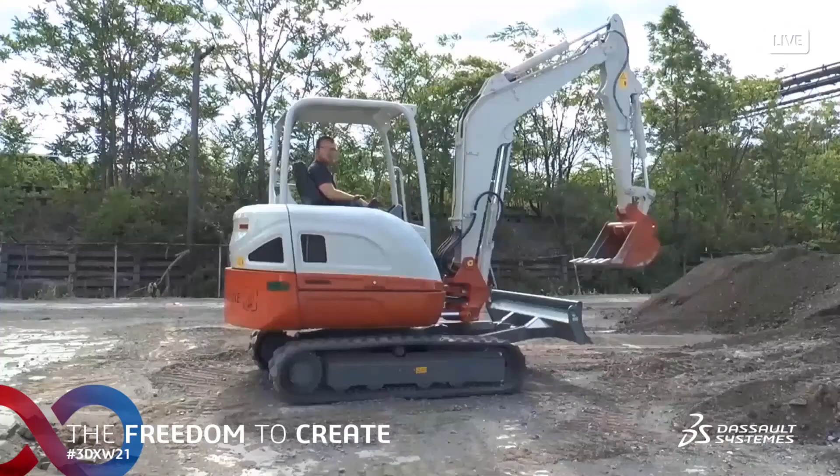So Green Machine, I love the company name, and you started to share a little bit about what it's all about there. But so is it a conversion process, or maybe you could dive into that just a little bit more? We sort of have three strands to the company. One of them is developing drive systems for OEM equipment, so actually taking diesel equipment and converting it to electric. The other is providing battery packs and drive systems to OEMs that want to develop their own electric line of equipment. And the third is actually a sort of sister company called Volta Energy Products, and they use some of our core battery technology in stationary storage. So this would be for grid storage, demand response, things like that.

Well, that's all very interesting, Noah. So thank you for sharing that, a little bit about Green Machine and also about yourself. So let's now just talk about Solidworks and how Solidworks earned its way inside of Green Machine.

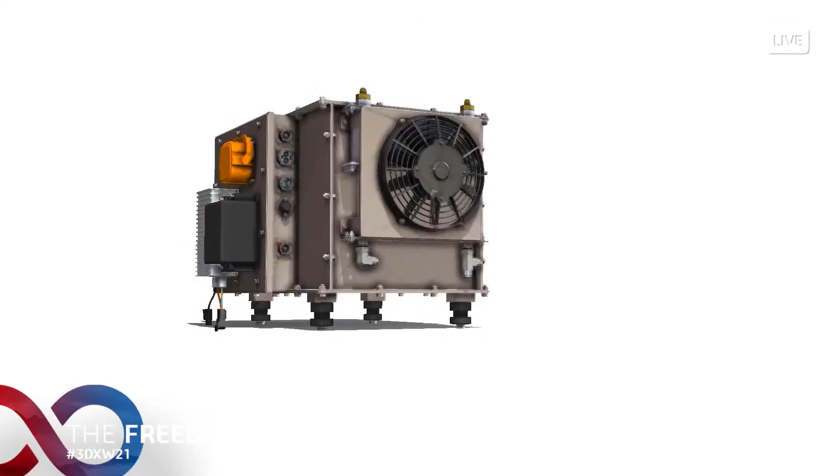Sure. So when we first started out, we were literally in the corner of a garage in a larger company, and we didn't have a whole lot of resources. So we started out literally using, it's kind of funny in hindsight, Google SketchUp for designing our battery packs and doing sheet metal design and things like that. We pretty quickly realized that wasn't going to be adequate for our needs, so we went out looking for a CAD system. We got Solidworks from our local VAR, and then we basically have been using it, expanding it to other engineers that come on ever since.

At some time along there, we realized that Solidworks by itself was not going to be enough, and we actually needed a data management system. For the first few years, we just used literally a cloud drive, sort of like Dropbox, to store all of our data. And then we would use its history features to do our best to keep track and control documents.

But it was just a very clunky solution. We would lose data or get overwritten all the time.

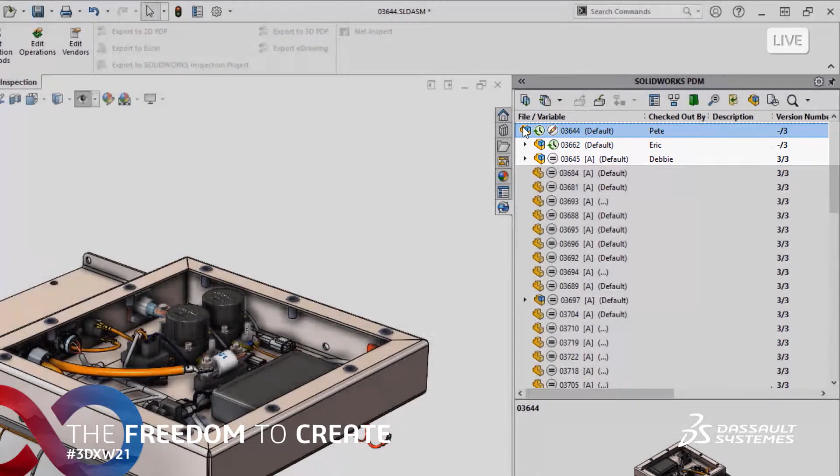So we went back and looked around for better solutions and saw that PDM existed and that it was tied in directly to Solidworks. Gave it a trial run, and pretty shortly after that trial run, canceled our subscription to the cloud-based service we were using before, which was not Solidworks cloud-based, it was a competitor, and switched over to PDM.

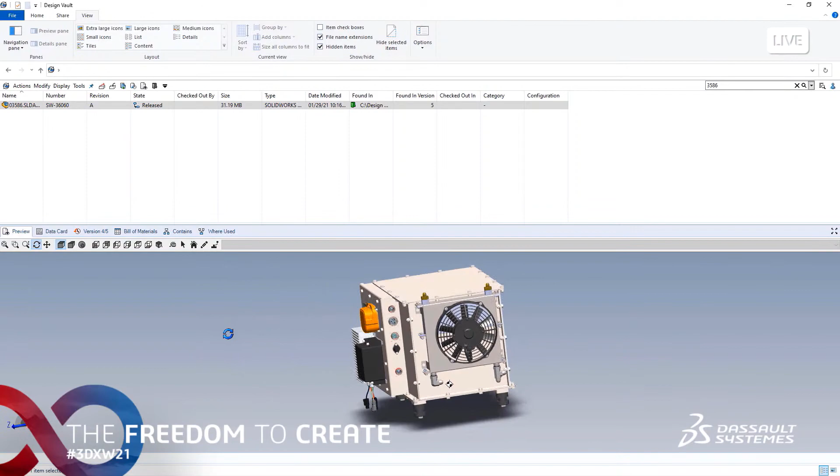The onboarding process was pretty seamless and painless, and we've been using it pretty successfully ever since then. Well, that's great, that's a great story to hear. And thank you very much for selecting Solidworks PDM Professional.

I have to believe that there's probably a selection criteria that you folks had on what you wanted the system to do, some minimum requirements, capabilities, et cetera, for your product design requirements.

Yeah, that's exactly right. One of the bad experiences we had with our previous solution was data getting overwritten or lost. If two people opened the same file at the same time, that was just a very bad situation to be in. So we needed to make sure that everything was revision controlled, all past versions were saved, that people were locked out of checked out files, basic product data management, things like that.

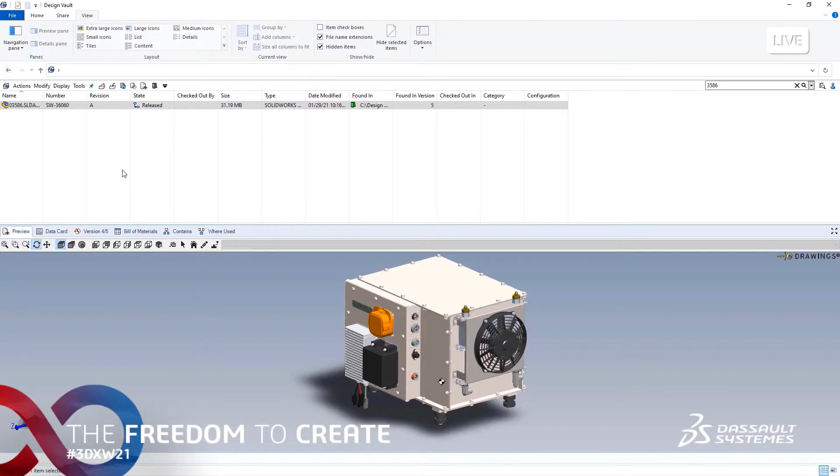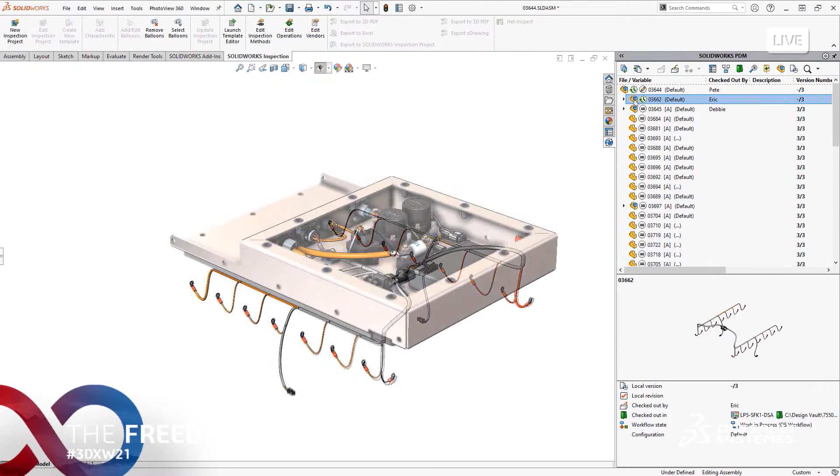The second thing is that we really needed it to be fairly easy to learn. Over the last year we've more than doubled the number of engineers that work for our company, and we need all of them to get up to speed and using the system very quickly. So something that takes a long time to learn, more than a week or two to get used to and start actually using the data management system, would really hold us back. So that was the second thing.

And the third thing we really needed, this one's going to sound kind of trivial, but it turns out to be actually pretty important for us. In our old system, the way we actually assigned part numbers was we literally kept a spreadsheet with a list of our parts and a list of each part number. Each time we added one, we incremented the part number in the spreadsheet. Again, it's one of these things we look back at and kind of laugh at how clunky it was, but that's what we did. And now that we have thousands of parts in our inventory, we needed a much better way to do that.

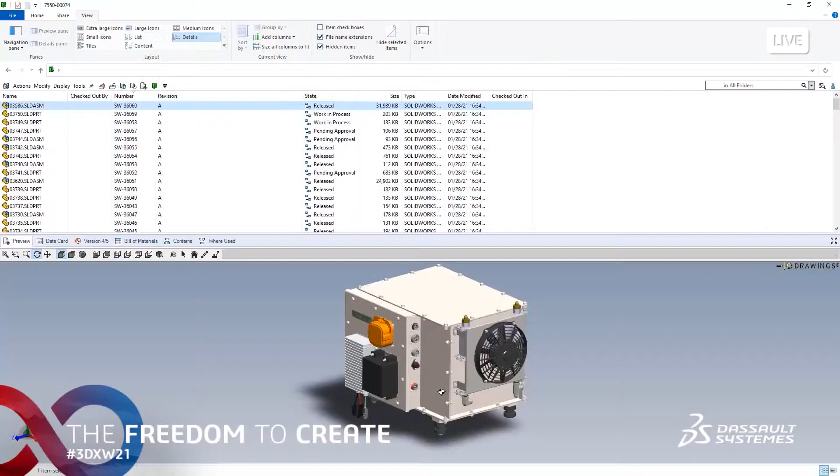And one of the features that we got from PDM, from our VAR, was actually a way to serialize each part that we add.

That's all very interesting. How about with any regard to regulatory compliance, such as now or in the future? Is Green Machine striving to meet anything like that, and where might PDM Professional play in that?

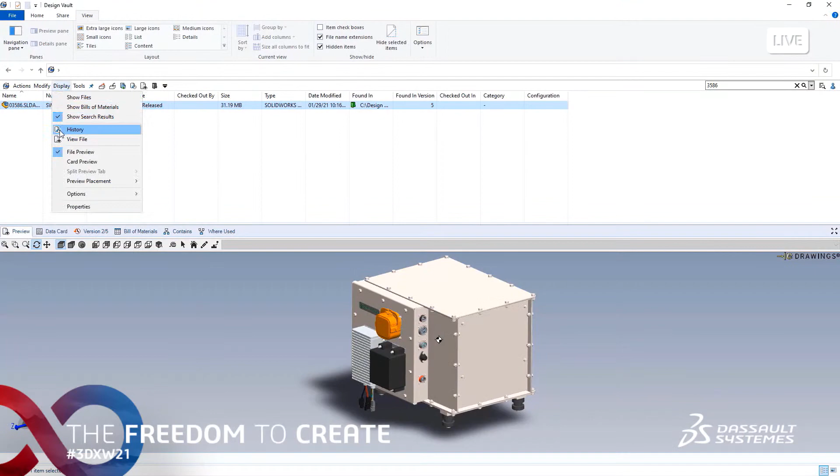Yeah, absolutely. So right now we are actually in the process of getting ISO 9001 certification, and having PDM to manage our data actually helps us comply with a lot of the procedures that are in our QMS. It's actually pretty critical to that certification process. There would be ways we could get ISO without having a robust data management system, but it just makes it a lot easier to build a lot of those procedures into the software and let the software actually handle the workflows and the approvals and the processes and so on.

So not only for your part design is PDM Professional being used, but for other non-CAD things as well, like the ISO documents you just explained.

I didn't hear you mention anything about bill of materials, and that's always a big topic in our industrial equipment type of customers, how the bill of materials are generated, managed, and then possibly passed to an ERP system. Is that part of the selection criteria as well?

It sure was, and I should have mentioned that before. Before we had PDM, what we did was generate a bill of materials from Solidworks using its own built-in bill of materials feature. That worked well enough, but it was fairly hard to maintain because essentially we would just produce a spreadsheet, and that spreadsheet was a static document that we then had to have somebody, the configuration manager if we actually had one, maintain.

Now that we have PDM, one nice thing is we can produce a bill of materials directly within PDM without having to open SolidWorks. And that's actually nice for non-CAD users to go in and get that bill of materials, make sure that it's updated and so on, without actually having to have SolidWorks access.

Very nice. Well, thank you for clarifying the bill of material ERP topic. It comes up almost every customer situation, especially in industrial equipment. You mentioned many benefits. Are there any others that you'd like to share about benefits realized or things that PDM Professional is delivering that maybe you didn't expect on this journey so far?

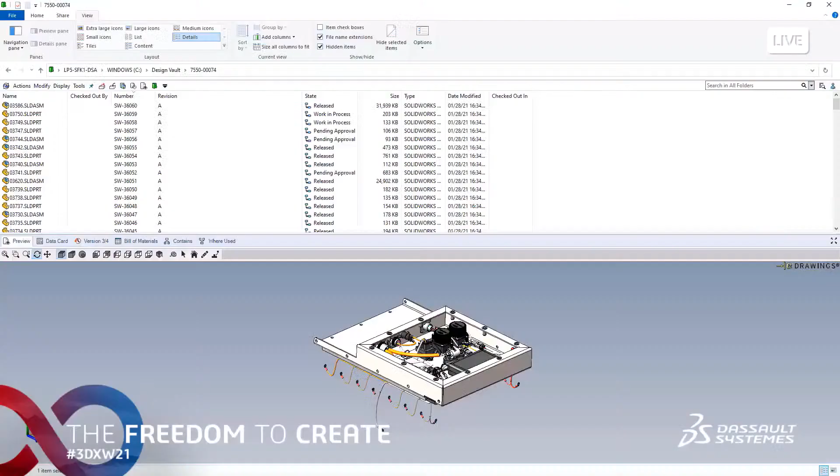Sure. So up until now, our approach has been keep it simple. So our workflows are pretty basic. They're a little bit of a step up from what was out of the box. We have different workflows for, say, Office documents and CAD files. But essentially, we have been able to build the workflows that we wanted.

Very good. Now, just about Green Machine, you mentioned the products you guys design and build. Is that 100% by Green Machine personnel and employees, where you do all the manufacturing, or is there any type of working with external teams or parties?

So yeah, we definitely interact with a lot of third parties, and we have a document handoff that needs to happen with all of them. As of right now, that document handoff is largely manual. Having PDM to at least make sure that internally we know which is the latest revision of various documents, and have notifications when there are revision changes to products, helps us at least know when we need to get those documents to those suppliers.

But what we really want to do, and one of our major next steps, is implement something like a web interface, so that our suppliers have access to those documents automatically and without us having to deliver them manually.

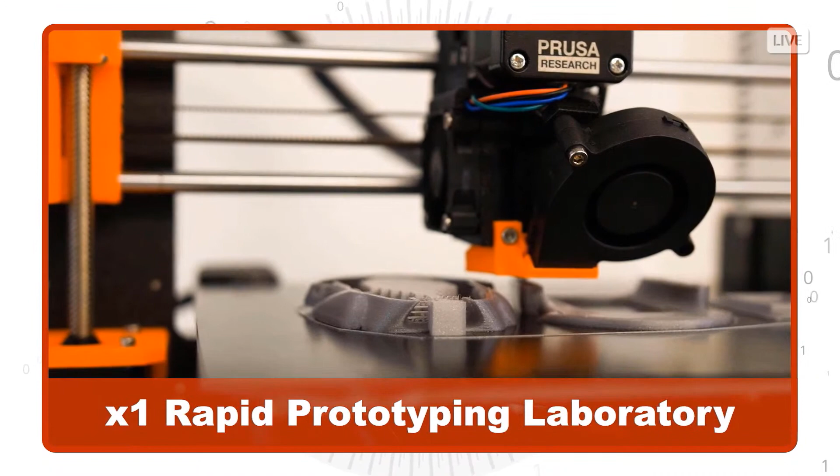Hello, thank you very much for having me. So I work for a company called Vortex IoT, who are a new and exciting company where we specialize in monitoring the outside environment. One good example is our product line called AQM, where we monitor the environment such as pollution and particulate matter in harsh environments such as heavy industry, as well as dense population areas such as towns, cities, and football stadiums. I myself am the Senior Product Design Engineer at Vortex, and I'm responsible for turning the products from concept and initial design all the way through to mass production.

Thanks for that background. It's really exciting when we meet clients that are using our software to make a difference in the world, being able to do things like detect pollutants in the air like you guys are doing. So now that we know a little bit about Vortex IoT and your role there as a senior product designer, would you like to share a little bit about your experience with SolidWorks and also the beginnings of the journey with the 3DEXPERIENCE platform?

Yeah. Whilst I joined Vortex IoT, we didn't actually have a CAD package in place. And SolidWorks were really supportive with us, almost held our hand effectively, and were able to give us a startup package which enabled us to get our hands on with SolidWorks and begin almost communicating with our factories and our third-party manufacturers, to be able to generate a concept and actually model our ideas, our concepts, and our rough prototypes, which was really, really useful.

We then really successfully grew the team, and we were effectively using SolidWorks through a USB stick, sharing files between team members, which was an experience, but it was okay. We did have issues here and there, and then we had what the rest of the world did, which was a pandemic, and realized that remote working became a new norm, which was a real issue for us, as we didn't have any cloud-based storage. So we then went along the lines of 3DEXPERIENCE, which allowed us to work remotely.

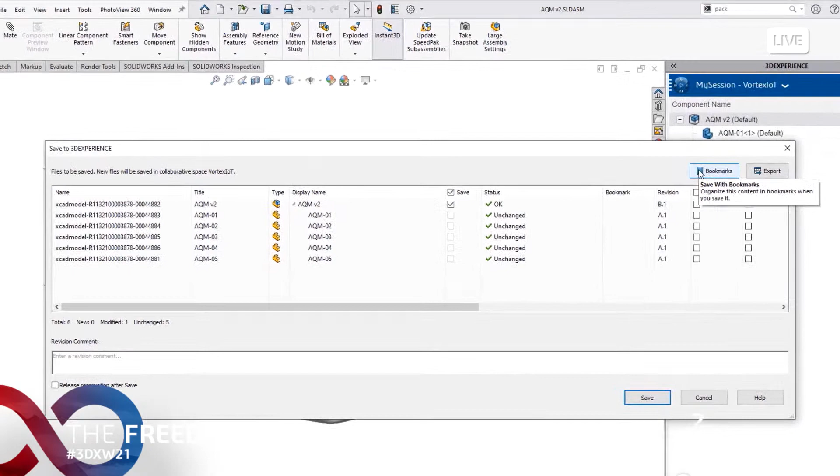So it's really important. We also needed a sync option to ensure that the files between all computers are the same revision and the same date. So we know which file we should be working at and which is the latest file, because that is vital so you don't rework it.

And we also wanted access control for two reasons. One, we like to share files with third parties, such as manufacturers for mass production, as well as different departments within the company. So it's really vital to ensure that those individuals only have access to the files they're meant to have access to, and not access to everything, which is just undesirable for IP purposes.

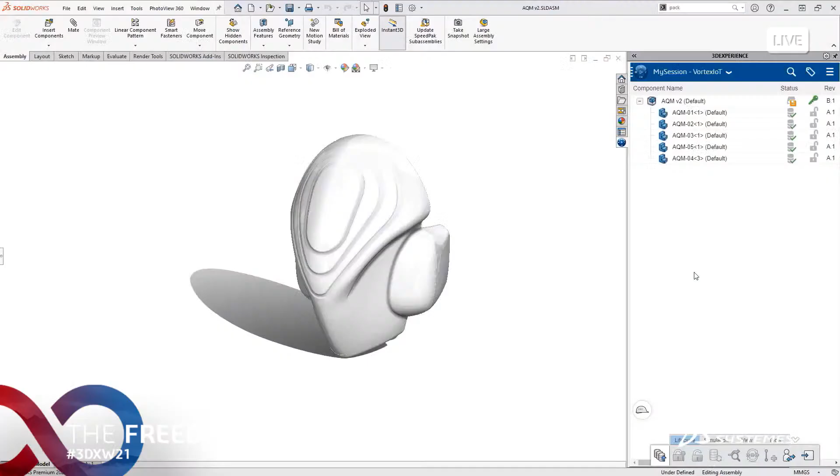We were then looking at effectively an option to be able to state who was working on which file, which in 3DEXPERIENCE is known as reserve or unreserve. And this was really vital, as we didn't both want to be working on, myself and a colleague didn't want to be working on the same file to have us effectively reinvent the wheel twice and have two different copies of this file.

So that was really important. And the biggest one by far was it had to be a hosted platform. We didn't have a massive server infrastructure, and neither did we have tens of thousands of pounds to invest in servers. So it had to be a solution that we could set up fairly fluently.

It would integrate with Solidworks really nicely, and the user experience would be intuitive, which is really important, as I didn't want to have to export my files every time I want to save to the cloud. So it was really a seamless integration, but also an integration that could be done on someone else's hardware, on the cloud, and not on our own server infrastructure.

So how did you find the onboarding process, and what was it like to get the 3DEXPERIENCE platform up and running for your company?

Yeah, so it's a really good question. And if I'm honest, it was a lot simpler than even I expected. We're always told it's a really quick and seamless integration. But as usual, we were fairly skeptical on this. And we gave it a go, and our reseller was able to give us a really good demonstration of the product. They were able to give us a hands-on experience with it as well, which is vital, because we are able to sort of test and evaluate it for ourselves.

Once we decided that 3DEXPERIENCE seemed to be the right product for us, we simply contacted the reseller, asked them to be able to have our login accounts accepted. And the onboarding of getting access to the platform was as simple as we received an email, which was an invitation. Click the link, set up your password, create your account, and you're in.

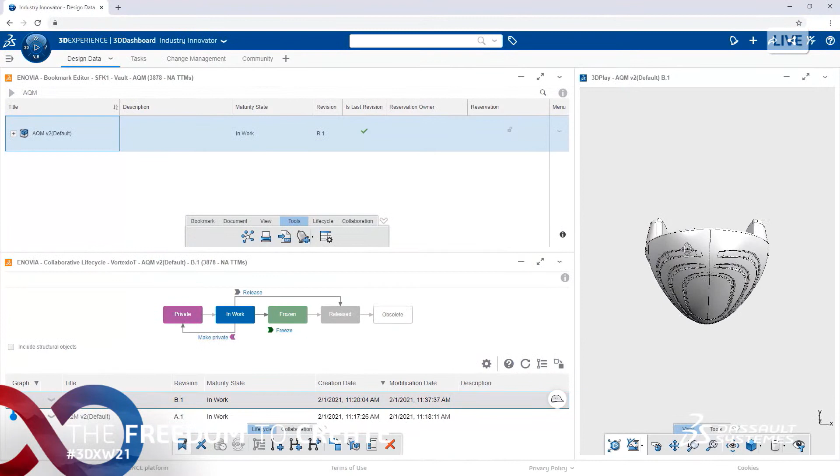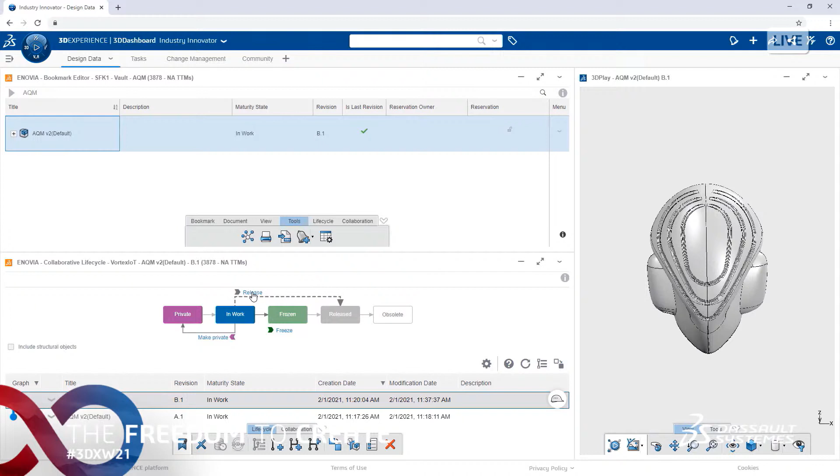That's one of the massive advantages in this day and age - majority of platforms are now moving to web-based access portals, and it's becoming standardized across everything. It's really useful because if I just want to access parts, do revision control, or investigate which parts are available, we have the web-based graphical interface right on the web page. I just fire up my browser, access it, and have access to all the parts. I can even preview them, which is really useful if I'm on a tablet or a laptop that doesn't have SolidWorks. I don't need SolidWorks to access our parts, preview them, move them around, and share them. So I can access it on any device without needing all the licenses sorted - it's just my account and credentials, which makes it a lot simpler, especially when I'm mobile and need to review a drawing or design.

Great, oh good to hear. Yeah, always good to hear that it's working on the different devices and everything.

So as far as where you go next, Vortex IoT is a growing company - you guys are expanding, going into high volume production. Do you have any expansion plans for the 3DEXPERIENCE platform? You mentioned it's easy to add users and roles - do you have any plans for using more functionality of the platform?

Yes, we do. Interestingly, we're actually looking into adding PCBs. I believe you've got a connector that allows us to import PCBs and design schematics. We have in-house PCB prototyping, so we actually design and manufacture our own printed circuit boards - effectively a motherboard, or a little town and city as it's often described. We import these into our CAD models to ensure clearance between components. We've been working with other departments to import the 3D files so we can perform clearance and interference checks, ensuring we're not clashing with components and not shorting out anything on the motherboard with our screws and bolts, which is really useful. We're definitely looking into having several departments work with us and share their data so we can pull it all into one location, which is fairly useful for us.

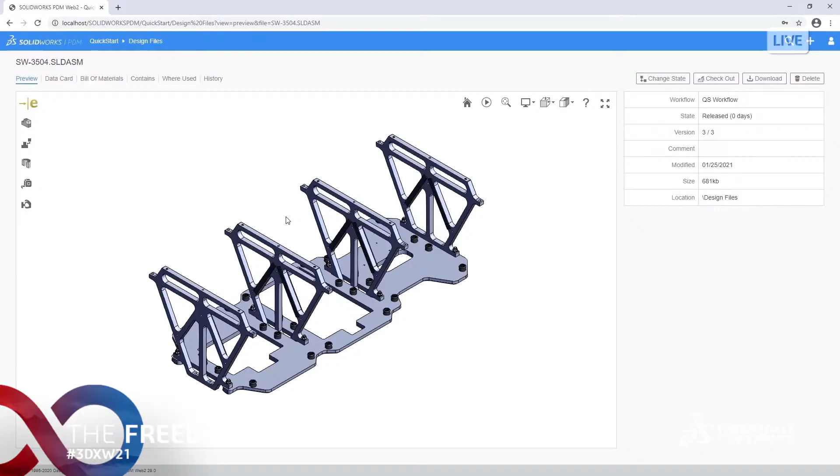Since the early days, Web 2 has been enabling companies with remote data access for various requirements. In the case of Green Machine, they'll be looking to improve upon a more hassle-free method to share release data to external manufacturing firms in a secure and controlled manner. With included eDrawings Professional, the external users can obtain measurements without the need to open in SOLIDWORKS.

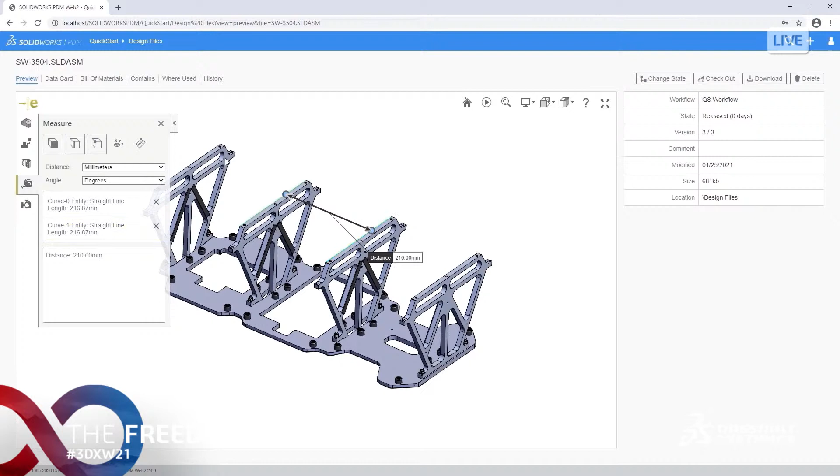Whether you're a field engineer and need to access the latest designs and documents, participate in a change process, or view the latest bill of materials information, Web 2 is being used to handle these tasks and more. I also heard Noah talk about a future initiative to better automate their engineering change process.

You're right, Lisa. They have a project underway with their partner, CAD Dimensions, to design a best-in-class engineering change process managed by PDM Professional. This will take advantage of more automation techniques within PDM Professional workflow.

A very popular one is automated PDF generation upon an event such as a workflow change state to approved. A PDF is generated, placed in the appropriate location, and notifications are automatically sent. This can include external parties, plus you can also automate bill of materials information for ERP export.

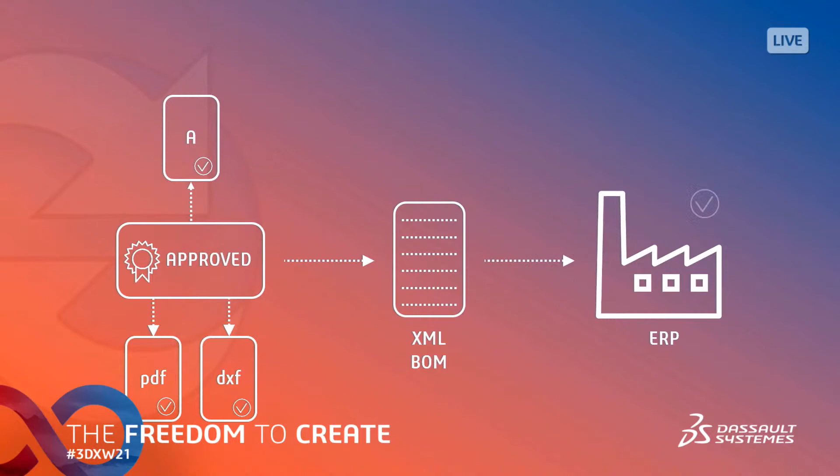That's great, Patrick. Now, Lisa, Bryce mentioned how easy it was to get access and implement their solution. Exactly. That is one of the main attractions of the 3DEXPERIENCE platform. You heard Bryce mention that in order to get access for the users, all they had to do was provide email addresses and they were all in.

Bryce is a big fan of the dashboards and the bookmark capabilities. He's streamlined the onboarding at his company by creating a standard dashboard for all the users that included bookmarks for their products as well as the viewer.

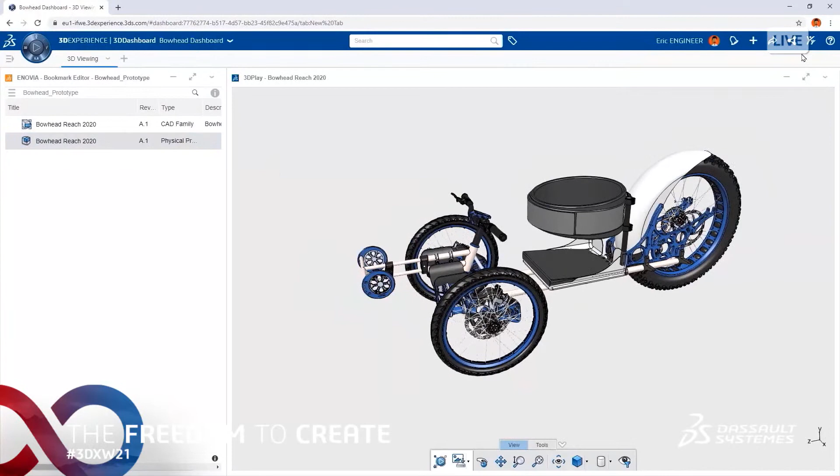This way the users didn't have to do it themselves, and he knew what everybody was looking at, the same interface in the browser from any device, anywhere, by the way. It's very similar to the way the folder structure is the same in PDM Professional, and you just make sure it's very consistent.

Lisa, looking at the products created at Vortex IoT, they must have electrical CAD data to manage. Are they looking at our Altium Designer connector for the 3DEXPERIENCE platform?

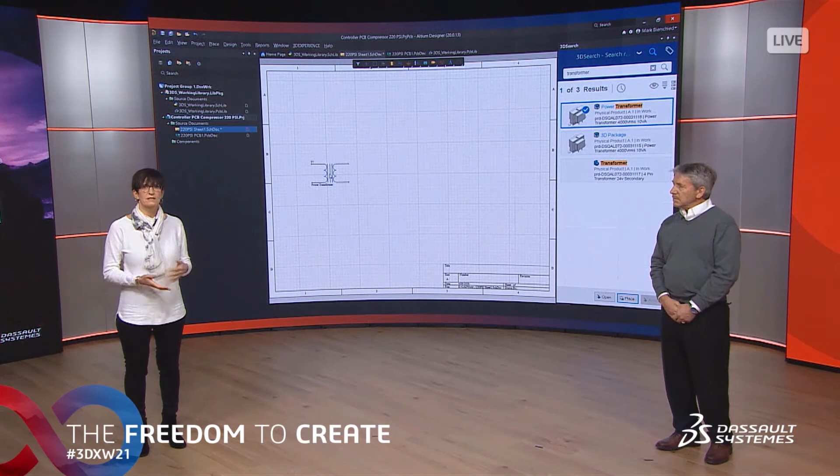Absolutely, Patrick. You're right. The future expansion options for Vortex IoT, as we mentioned, include the Collaborative Designer for Altium Designer. It allows the electrical Altium designers to connect to the platform to manage their data, including the libraries and the manufacturing output files. This means that all of the setup done by Bryce for the mechanical users will automatically apply to the electrical users as well.

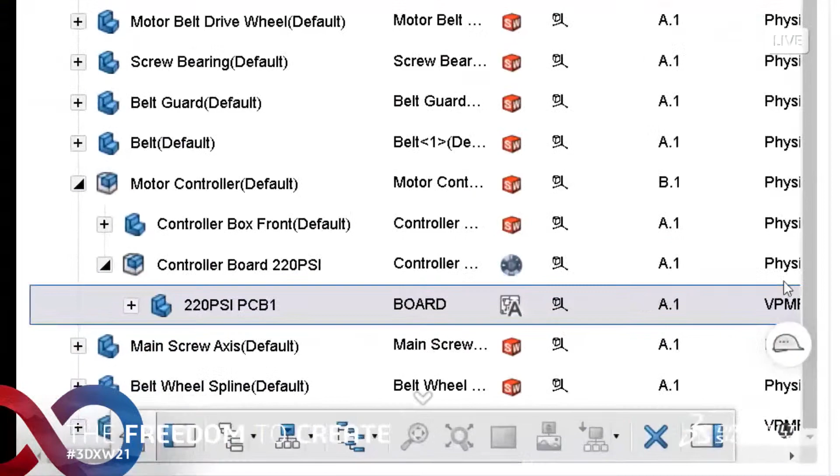So things like the access control, revision control, and the workflow that he's established for the engineering data in general. The Altium connector also creates product structure that then can be added to make that complete bill of materials of their products. And the roles of the product release engineer and 3D product architect can manage all of that data, mechanical and electrical, even for non-CAD users, right?

So it just allows you to have access and create more engineering information, stuff that may not have ever been modeled at all. And it's a super easy way to add roles on the 3DEXPERIENCE platform. You can expand it very easily.

Returning to our story where people scattered throughout the world were collectively working toward a common goal, here's another historical example and relative to today's pandemic. Jonas Salk, Hilary Koprowski, and Albert Sabin all played pivotal roles in developing the polio vaccine, yet they didn't work together or share their notes.

Today, we heard from Noah, located in Colorado, and Bryce, from Germany, utilizing completely different data management tools, yet both products solve their challenge of managing all types of data, CAD and non-CAD, across their entire organization.